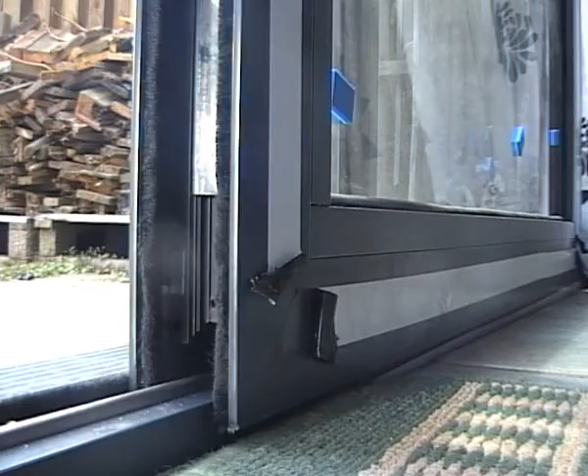Okay, with the bracket off, let's see whether it improves the glide. Seems to be a bit improved, but I still think there's some friction bearing there.

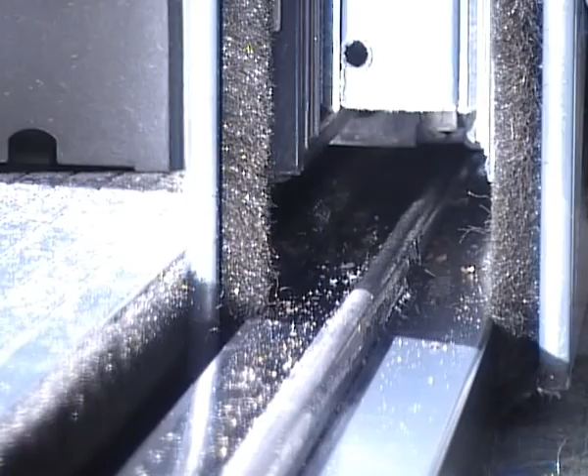I would say it's still not happy. Let's have an actual look at the roller itself. Don't want to go in too far, but it'd be good to see it. So we think it's around about in there. Now I'm just going to pull it slowly towards me.

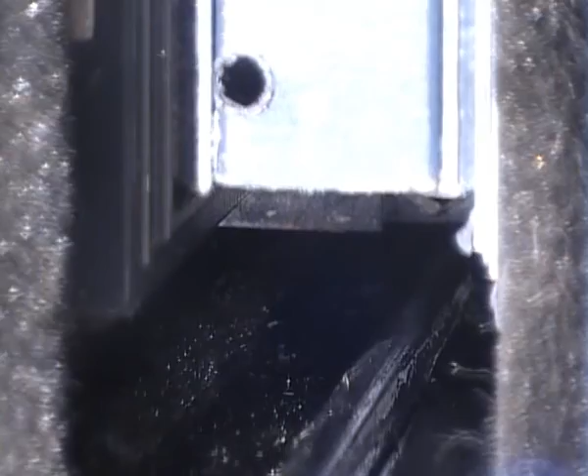That seems to be one of the stickiest points, just there. You can hear it grating away. I'm just going to turn the camera upside down to see whether I can see right the way down to where the roller is.

Well, I think that proves that the door is sitting firmly on its track and roller, but that there's still friction, and we're not sure where that's coming from. It could be that there's friction on the roller itself, resisting rotation, and that's causing the screech, in which case it means that maybe the roller is knackered, or its housing is somehow exerting pressure on the roller, or it's deformed in some way. All of these are workshop issues to sort out.

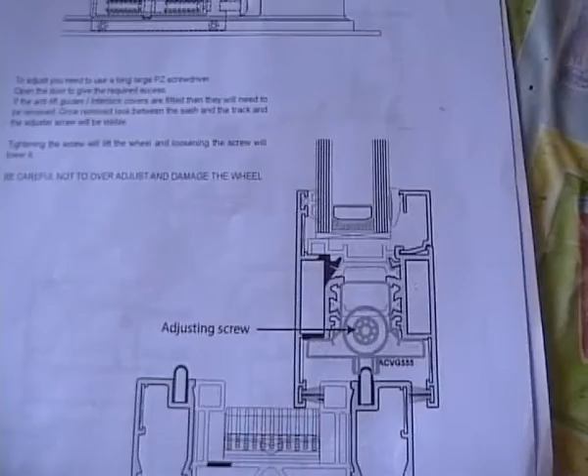There's also the possibility of adjusting the roller, possibly - it just needs to be lowered. But in order to get to that adjusting screw, I would have to remove pretty well all of the trims, and in this case as well, the lock. And it's a multi-point lock, so it's got bars extending upwards and downwards as well. To take that out and get to any adjusting screw would really be beyond me without a great deal of additional technical and expert support.

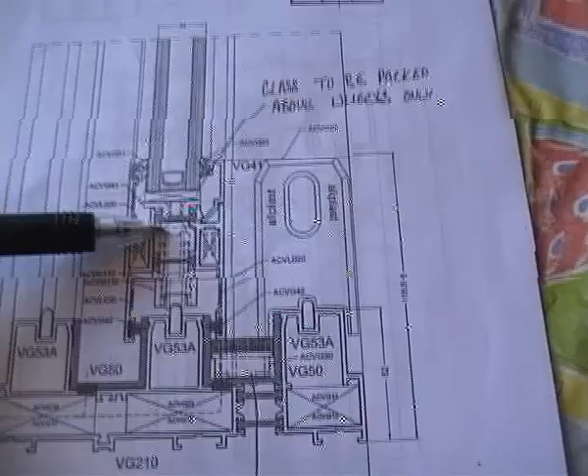There is one thing that comes to mind, and that is that when I actually installed the glass unit, I noticed that the packers underneath the glazing - these are the packers here - were fixed through with some extremely long screws. Now it could be that one of those just happens to coincidentally be on top of the roller and has somehow fouled with it. So it's not too difficult to get to that screw and check it.

I'll have to take the seal out, and I'll also have to take the glass out, but I put those in as part of the installation process, so I should be able to do that quite easily.

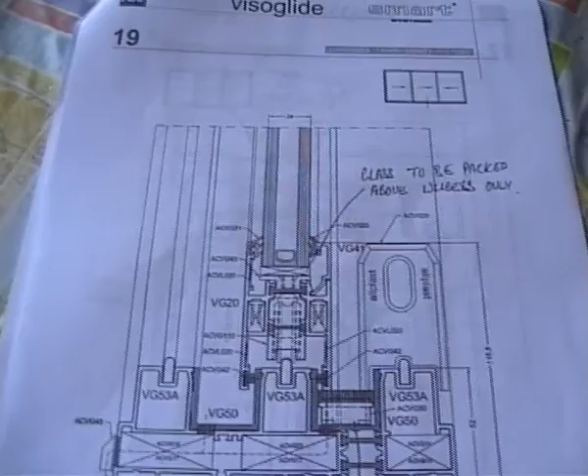So as you can see, I've removed the glass now, and if I focus in on that, that's the packer and the screw that I was talking about, which could be on top of the roller or not, I don't know. And that's the one at the back as well. They both look further away to me, so I'm not very hopeful that this is going to actually work.

Let's see whether there's any change, seeing that the glass weight is now taken away in terms of its tracking. Looks easier, but it's still not happy.

Okay, the screws are out now, and let's see whether it makes a difference to the friction. I'll just put the camera down out of the way.

Well, that's better, isn't it? I think we've found the problem. I'm not quite sure how, but that does seem to be much improved. That's running smoothly now.

Time to put the glass back in. Okay, so here we are, 5 o'clock on the 10th still, having put the glass back in, and now about to give the patio doors a full test. So will they slide or won't they? Have we cured the problem or haven't we?